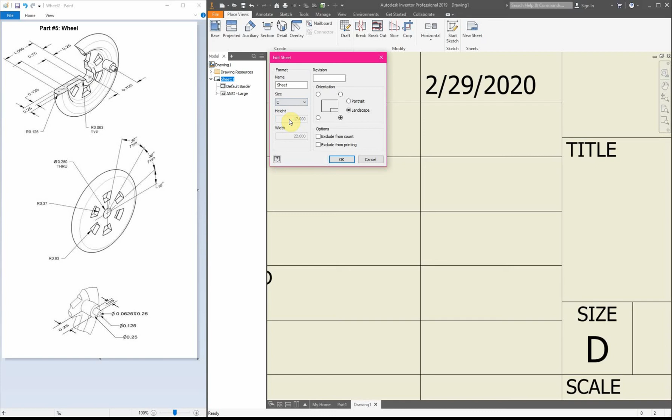Some students like size A, so I will give you the option. I'm going to switch to size C. If you switch to size C, you can leave ANSI large. If you are at size A, then you're going to need to change the title block also to size A, so you need to be aware of that. Size A title block is only for size A paper, and ANSI large is for everything except for A paper. So I'm going to go to base—oh, I forgot to save my part.

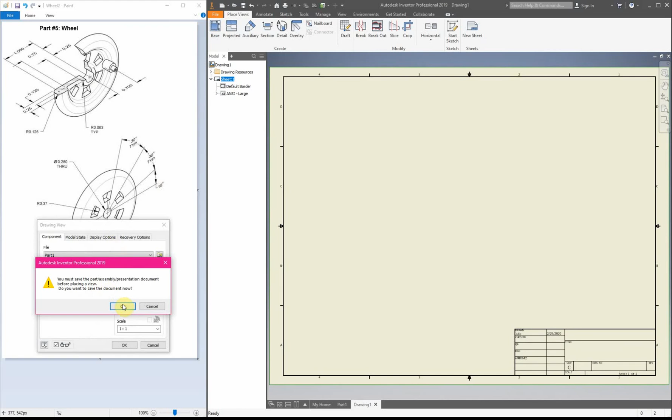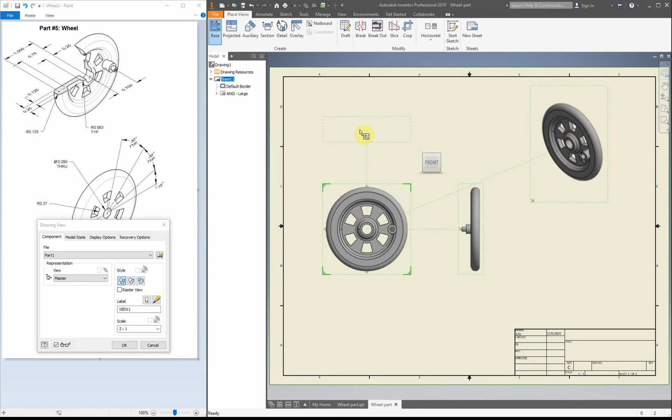Okay, so right now we can see it is very tiny. I'm going to change this 2 to 1. If you're on A size paper, 1 to 1 will most likely work just fine. I'm going to place it here. I am going to have a right side view and an isometric. I'm going to leave the top view out for a little bit later. I'm going to click OK. Also make sure that your hidden lines are turned on, not hidden lines removed.

So hidden line turned on, click OK. I know right here it doesn't look like there's anything, but those nice smooth curves that we have blend together and make this kind of flat looking. So we're going to double click, blue sphere, click OK, so now it's shaded.

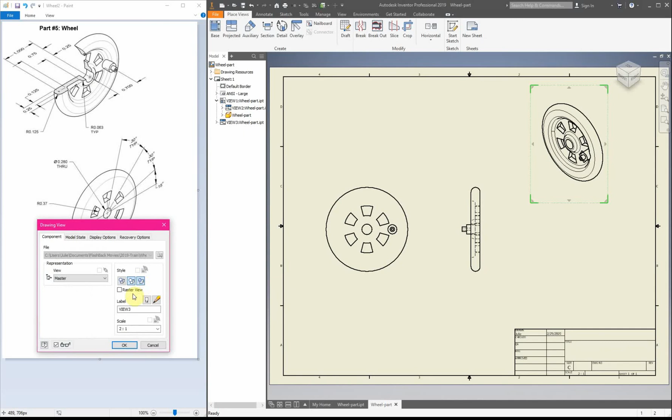So I'm going to click on the section tool. The section tool, what it's used for is to kind of slice your object in half. I'm going to click on section, click on my front view, make sure I take this line and move it outside the part, not the green dot, outside the part. Right click, continue. My pop-up's in my way. I'm going to place this right up here. So we can see our section AA, we have AA.

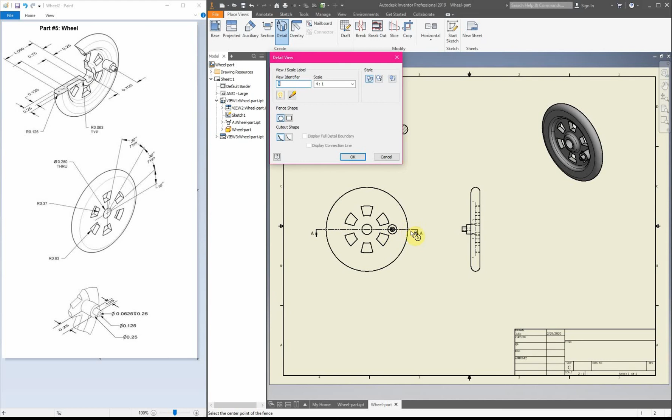And this is for the detailed views—I'm going to leave it to you if you actually want them or not. I'm going to show you how to put them in just in case you decide you want them. So detail, I'm going to click on the front view, and that has this little pop-up show up. I'm going to click about midway between this kind of peg looking thing and the edge, and drag it out to about here. So B is outside of the part, but the circle is large enough to have all of the peg looking piece. So I'm going to move that down here.

I am then going to use the detail view again to grab this. So I'm going to click kind of around here and here. So that is my detail view C.

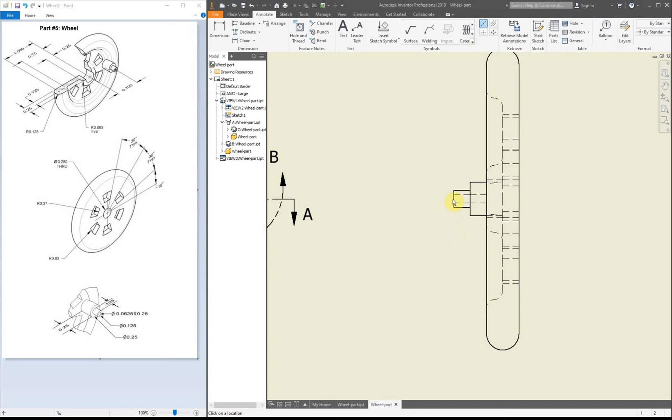Alright, so from here, don't forget the little things like your center marks. You're going to need them in a lot of different places. And your center lines. For this one, I'm going to use this center line bisector, because I can click on this point, click on that one, great. And I can do the same thing over here, and same thing over here. Remember, if you zoom in or out too far, you can just press home on your keyboard.

So again, we have the hole and thread tool. I'm going to just show you a little example over here where I'm going to use the hole and thread tool on this view. Because I have it on this view, I don't need to have it in here. Because if I put all the arrows on this one, it's going to get very cluttered very quickly, and we're not going to be able to see what's going on. But if I put it down here, now all of a sudden I can see everything without having an issue.

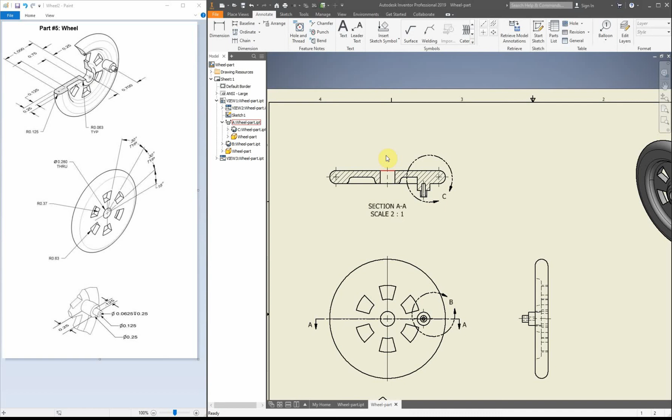So there are a lot more dimensions than that you need to put in. Let's see, oh I forgot a center line. I'm going to use a center line bisector for this one. So the way I could tell that that was missing is I just kind of looked at this, went straight up, and I knew it was missing.

So I'm going to show you the dimension tool for how to put in these angles, because these are a little bit tricky. So we click on this center mark, that's why I put it in first. This line—do not get the green dots—and move it over. With this, actually with this one you don't need to put TYP, but on the next one, line, remember no green dots, and try to line these up the best you can so they kind of look a little nicer. Because these are going to be the same all the way around, we can write TYP, so space TYP.

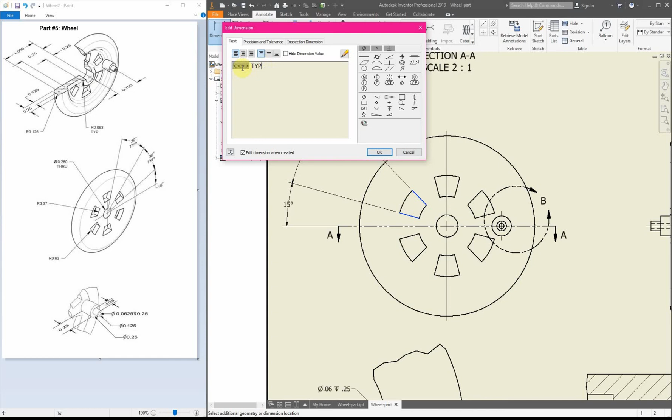And if you're wondering what these little gray arrows mean, it's just kind of the placeholder of the number that's going to get pulled in to your working drawing. And I could do the next one. Again, remember, avoid the green dots. And space TYP.

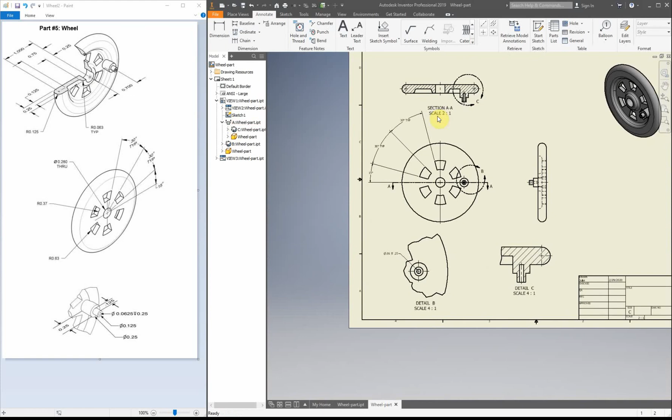Okay, some people might have an issue where this gets put into that. What you could do is just take this, maybe scoot it up, or scoot this down, maybe move this over. Kind of depends on what you need to do.

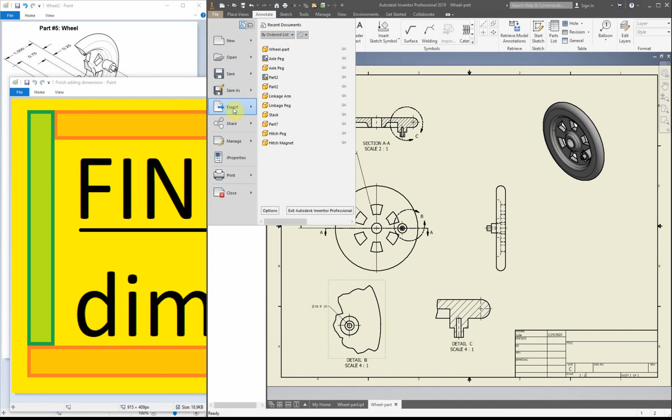So this is just a quick introduction. Don't forget to fill in your title block—some of you have been forgetting that lately. And now you are going to get to finish adding the rest of the dimensions yourself. So good luck. Also, don't forget to turn it into a PDF at the end. Again, it is File, Export, PDF. Okay, good luck.